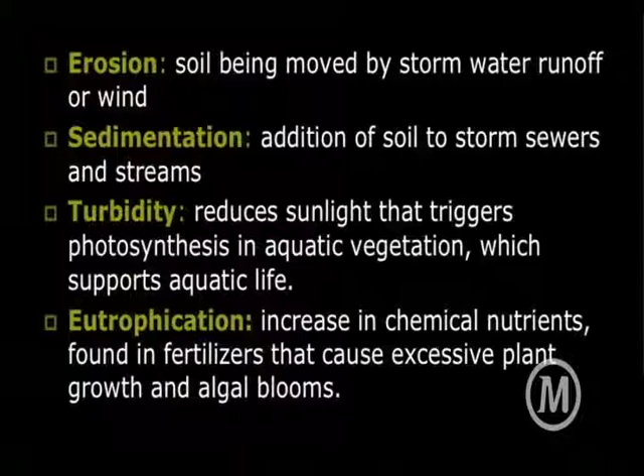So kids, we talked about how a lot of our most decrepit buildings in this country are schools, and we're trying to change that, but we let it get a little too far. Kids are really susceptible during these developmental stages to toxins, and a lot of asthma and problems like that are coming from the VOCs, the volatile organic compounds, in those spaces.

HVAC systems that don't run efficiently, that aren't kept up, the maintenance isn't held up. So it's really important to be addressing schools.

So how LEED addressed it: there's actually a prerequisite that says if it was previously a landfill, it cannot be a school. Any other type of brownfield can be remediated and get up to standards that allow a school on it, but it's really about being sensitive to the sites you choose.

And like we have a little girl here rolling around, who knows what they put in their mouth, so being sensitive to the actual site itself as well. You want to look at EPA standards, ASTM standards. Those are our testing standards to really see if we're meeting those codes.

So some strategies. Here's a shot of Europe actually working with its environment, where it just looks like it naturally evolved like a mountain out of those rocks. Not something we see much here today.

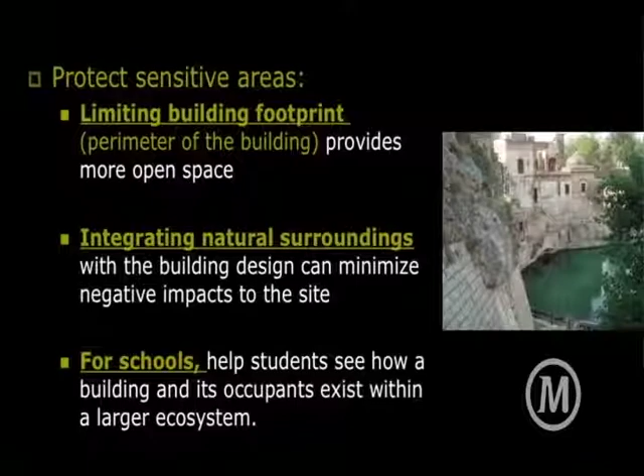So protect sensitive areas, limit that building footprint. That's what I talked about, even with contractors: limit your construction footprint as well, taking that a step further with integrated project delivery, thinking about how you want to design the footprint of your building to maybe work around what's naturally there.

That can be a cost saver too. Maybe don't dig out that boulder, maybe work around it, maybe don't dig up all those trees. Make it part of your shading that you want to use for your building, helping with passive cooling and daylighting by using natural vegetation around you. There's a lot of cost benefits from looking at this environmentally sensitively as well.

Triple bottom line: integrating natural surroundings, like those buildings emerging from those rocks, and for schools, helping kids see how they're engaging with their environment and how buildings impact that. There's a push for integrating that into the curriculum and having kids engage with the buildings themselves, whether it's a composting program or a green roof, and kids are sponges.

What we're teaching them is what they're going to carry on. So I think this is an important area to be hitting, and it looks like we're going that direction, or at least LEED is really encouraging that. So there's that social side as well. Sustainability and equity is really the key to success here.

Here's an example of a credit within the LEED rating system for building design and construction, new buildings, that got more heavily weighted. So here we're looking in the context of LEED. SS, remember, is Sustainable Sites. The title of the credit is development density and community connectivity.

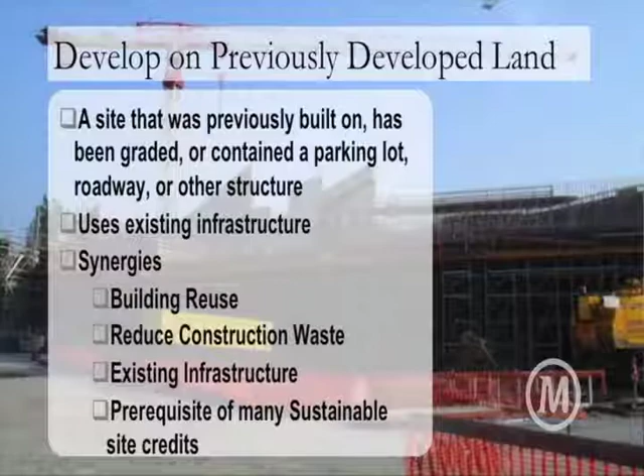It's about getting out of that comfort zone a little bit, but to me it's a lot more of a fun process. Reduce construction waste - less goes to a landfill if you're reusing it. And existing infrastructure, once again - not having to take roads, power lines, and utilities out to some natural place far from the city. Many sustainable site credits actually require using a previously developed site, so that's something to take into consideration if you're working on a LEED project.

So, develop in dense areas. There's a lot of things that come with a dense area, previously established. And when we're talking dense, it doesn't have to mean big skyscrapers - we're kind of talking about Europe. People love to visit Europe because it's human scale, about average 2-story buildings. It's not overwhelming, it's walkable. That's really what we're talking about - and sure, maybe a city as well.

So, reducing urban sprawl, protecting undeveloped land, protecting resources, giving more access to public transportation, reusing service lines and roads, and community connectivity - that's how LEED refers to it. You want to build in a densely developed area, and that's about 60,000 square feet per acre, which is the metric established by LEED.

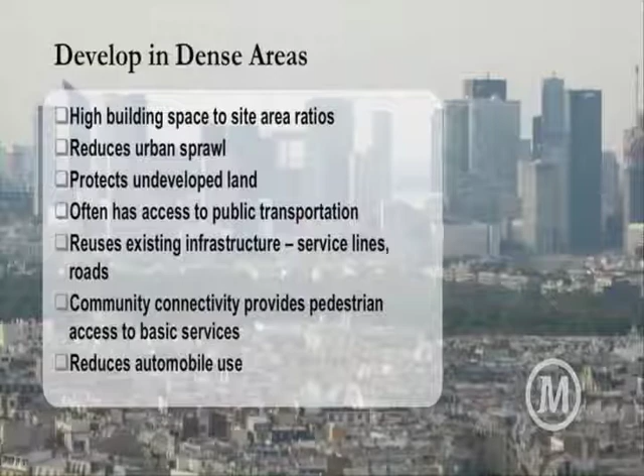Once again, that's one of the benefits of LEED - it just gives us a metric. What is a good density to be going for if we're planning a city or neighborhood design? It gives us some metrics to lean on. And community connectivity, according to LEED, that's about a half-mile walking radius to 10 basic services - restaurants can count twice. Banks, grocery stores, laundry - those basic things we're doing pretty much on a weekly basis on average - so you're reducing automobile use.

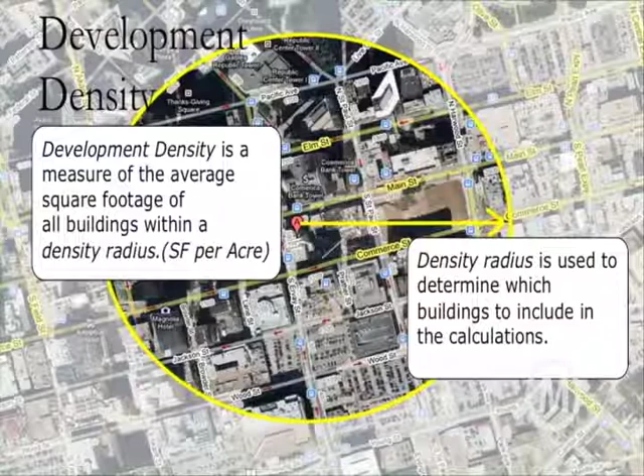So this is within the context of that credit that we introduce. Development density is one option for satisfying that LEED credit. Development density is a measure of the average square footage of all the buildings within a density radius. So this is a credit that has a little bit of math. It's not too scary - there's a square root in part of it, but there is a purpose for that.

You're just going to convert the acres of your site to square feet by multiplying by 43,560 square feet per acre, and take the square root of that. Calculators can do it for us, multiply by 3, and that gives us this density radius. So it tells us how far out we have to be considering the buildings to see if we hit that 60,000 square feet per acre number that says this is a dense, established area.

So that's our density radius. Any building even touching that radius would be tabulated in a table where we divide the building square footage by the site acres, and that's that building's density. You add those all up and get an average. If your average is 60,000 square feet per acre, then LEED has decided you're in a dense area - you meet the development density criteria.

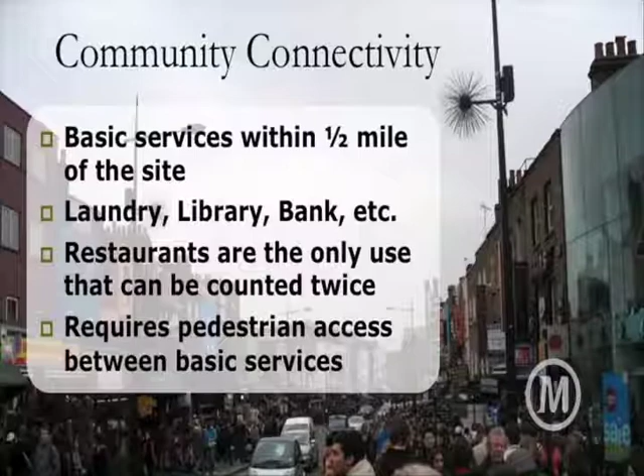Community connectivity - there's different options for how you can achieve many of the LEED credits. For this one you could either do development density or community connectivity, and that's a half-mile radius. So you don't have to do any calculations, just get the radius. If you're already in an area that has laundry, library, bank, those type of services, and you can walk to it - it has to have a pedestrian path - then you can meet this option pretty easily, just by listing those 10 different amenities and showing an aerial view of where they're located.

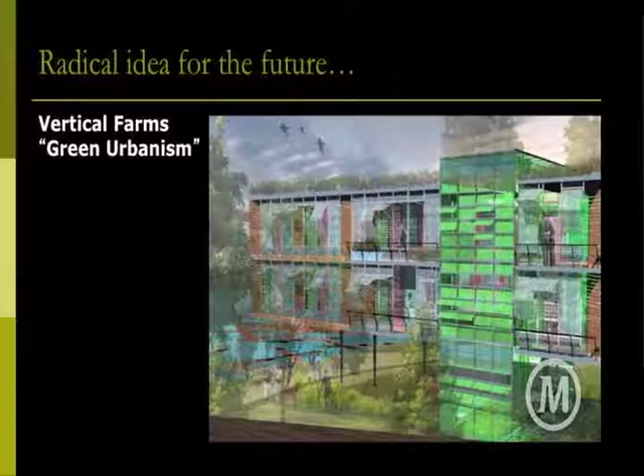Vertical farms - this is Ken Yeang's work. He's been termed many different things, godfather of green, granddaddy of green, because he's been doing this since the beginning of his work over 40 years ago. His work goes from eco-master planning, really looking at the environmental systems and how we're interacting with it. He mentions that with urban sprawl and taking these highways far out into natural areas, it's not just where those developments are - the highway is disrupting the ecology of the whole trip there, because it really depends on the whole space.

You disconnect it, you've broken those systems, that ecology of the area. So he really brings natural spaces into the building. He wrote a book on eco skyscrapers about how you can interweave some of these green spaces up and into the building. So you can have an urban building that actually has big terraces, natural ventilation actually working through, ramps, natural ways to get around. And like we discussed, people like to be in these spaces. We like daylight, go figure, we like natural fresh air. It keeps us more awake, more productive. We're happier people.

Brownfields - once again we're seeing an example of a LEED credit, this only being 1 point, so it's not as heavily weighted, but there are many reasons to maybe use a brownfield. A brownfield means it's contaminated in some way, and according to LEED, there's a couple different ways to verify that.

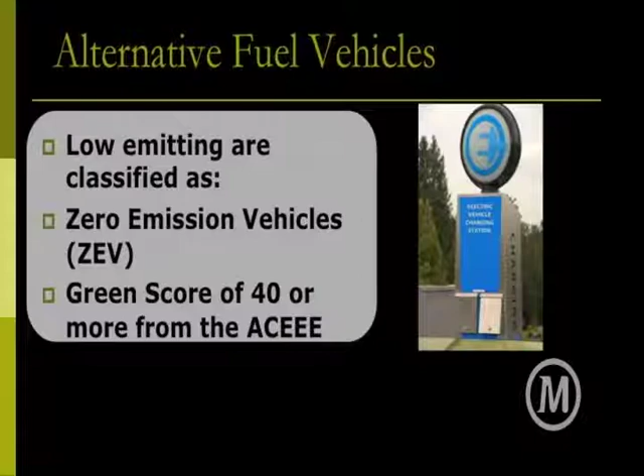Alternative fuel vehicles - so not just thinking about mass transportation, that's not available to everybody in every location. We're lucky here in Portland, Oregon. But alternative fuel vehicles are also very important - hydrogen, ethanol, hybrid vehicles, maybe run by biomass or biofuels. There needs to be some measure of how efficient these are. They have to be classified either as a zero emission vehicle, ZEV, or have a green score of at least 40 or more by ACEEE, American Council for an Energy Efficient Economy. And by the way, that was a refueling station for electric cars outside the Hawthorne Fred Meyer you saw an image of. So we're preparing for these changes - it takes the infrastructure, we have to lay down the framework for some of these big changes to be possible. It's good to see it emerging.

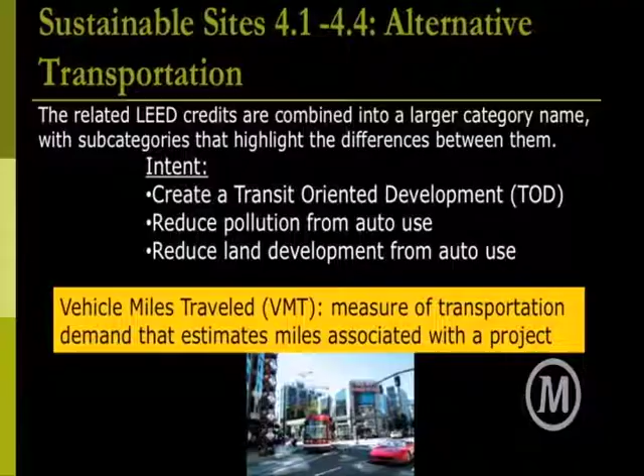So, sustainable sites, alternative transportation - this is an example where there are multiple credits associated with one concept. Credits 4.1 through 4.4 are independent credits, but they all deal with alternative transportation in different ways. There's a credit for mass transportation, bicycle parking, having racks available for people to bike - but not just racks. If you're going to work and you're all sweaty, that may not be appropriate for your profession, maybe it's okay, maybe it's not. So have a shower facility within the building for people working there or using that space. If they live there, they're assumed to have their own showers, but if not, you think about showers in addition to covered racks, a safe place for people to store their bikes. The intent is to create a transit-oriented development, TOD, reduce pollution from auto use, and reduce land development from auto use. So you're not only reducing CO2 emissions from fewer people driving, but also reducing the amount of parking area needed - the impervious asphalt pavement that has problems with heat island effect and stormwater. So it's multiple effects - you have to look at not just one element, but many sides to all these strategies.

Vehicle miles traveled, a metric you can use - VMT. It's a measure of transportation demand that estimates miles associated with the project. So if you have a carpool program, or parking spaces available for electric vehicles for a certain percent of your building, then you're reducing the vehicle miles traveled associated with your project. You're taking that initiative.

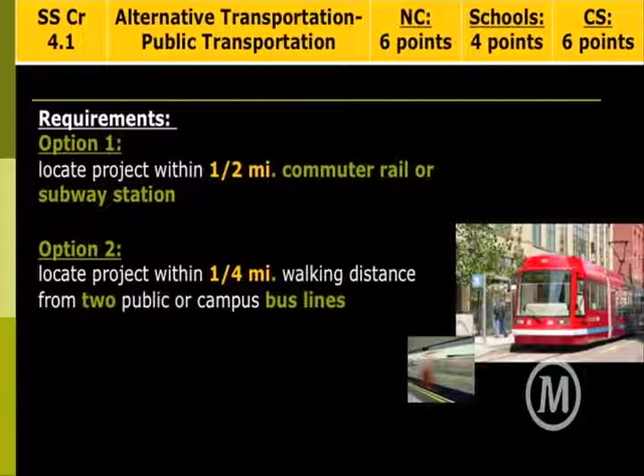Here's an example - much more heavily weighted in 2009 is alternative transportation, public transportation. It's basically encouraging you to take advantage of these amenities if they're in your area. In Portland, we don't have much of an excuse to choose a site that isn't close. So 6 points for new construction, 4 points for schools, 6 points for core and shell - but here's what we're really talking about today. Do you remember how many points it took to get certified in LEED 2009? 40? Yes. So 6 points is a lot for one credit, and this is just to locate your building within half a mile of a commuter rail or subway, or within a quarter mile of 2 bus lines. You could locate your site there. When you're going through your ecocharrette with your scorecard out, you go, low-hanging fruit, this is easy for us - 6 points, we're within a half mile of the MAX line if you're in Portland. This is something you want to identify early on in a project, to know your opportunities, when setting targets for LEED certification or sustainability. Because there are many incentives and inclinations to get certain certifications, in addition to just good responsibility and showing you took these initiatives.

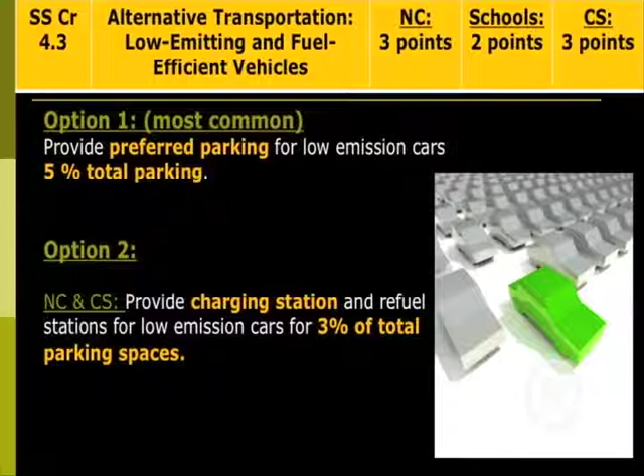Here's an example within the same sustainable sites credit 4 family, but it's 4.3, dealing with low emitting and fuel efficient vehicles, like we looked at in that past slide - 3 points for new construction, still pretty heavily weighted, that's why it's in orange. This is providing preferred parking for low emission vehicles, for 5% of the total parking, as one option. Option 2: provide a charging station to refuel those electric cars or whatever alternative vehicle it is, for 3% of the total parking spaces. So once again, you have options in many of these credits for how you achieve it.

So we're talking about 3% of the parking, or maybe 3% of the full-time equivalent occupant. This is another measurement that LEED uses for calculations. That's really what's useful about LEED - we're using a metric, something universal for understanding this green building rating system that evaluates how sustainable a building is. So full-time equivalent occupant - you have to understand how many people are actually using the building.

You're not just counting people, because some are going to be there part-time - whether you work half-time, or you're in a retail space with transient occupants coming in and out. So how do you calculate it? A full-time equivalent occupant is somebody in the building 40 hours a week - their FTE value is 1. This is an important concept that runs through many credits within the LEED rating system when you're doing calculations.

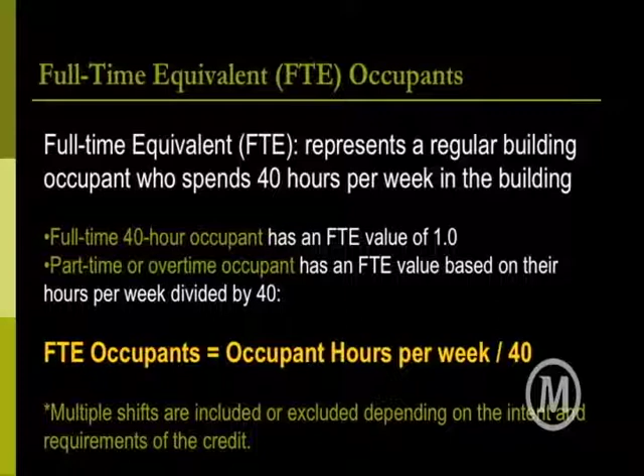For a part-time or overtime occupant, you take the hours per week divided by 40. So if you work 20 hours per week, half-time, your FTE value is 0.5. Not scary math, just something you have to be able to evaluate - occupant hours per week divided by 40.

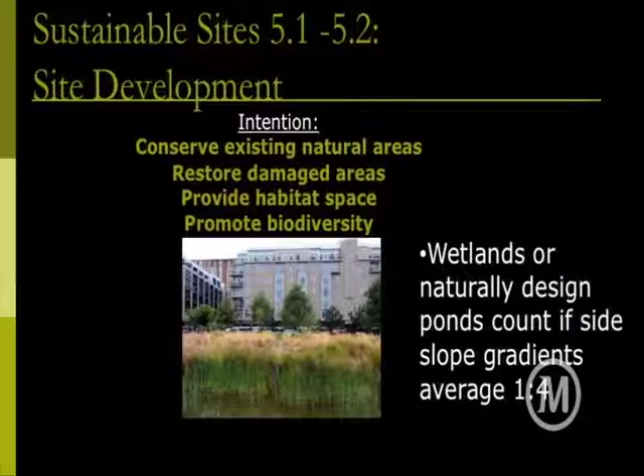Site development has 2 credits related to it, but the intent is the most important part: conserve existing natural areas, restore damaged areas, provide habitat space, and promote biodiversity. Biodiversity is that natural variation in ecology and how these systems work that we really can't recreate. When we cut down trees and replant one type, we're not recreating what was already there - we have to be cognizant of what's native in that area and what will actually survive. Wetlands can count towards open space in the LEED rating system.

But if it's a big crater or something we've created, it can have more of a slope of 1 to 4 on its sides. Here's a shot of Portland showing this wetland type area in the middle of a very vibrant community in the Pearl District. This was a choice made, I'm sure very early on, to preserve that land and let those natural ecosystems do their job - help with stormwater management, lower utility bills. Just let that site do what it's intended to do.

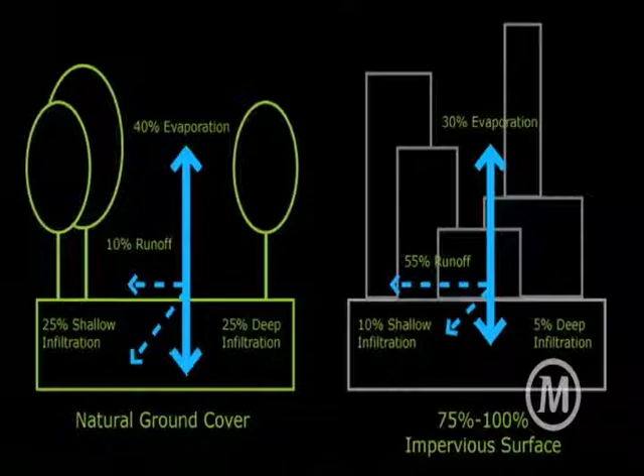Here we've got impervious surface, like 75 to 100%, not atypical for a developed area. And here we only have 5% of it going back into deep infiltration, recharging those aquifers. That's a problem. If we look long term, when we get into the water section, we'll see why this is such a problem and why we are going to see some changes in the next few years.

55% of it is runoff, so we're just shooting it away. In Portland, we could be using this for many resources. California would be envious of the many months of rainwater we could collect and reuse. Our codes are just catching up with that now, letting us actually use that rainwater for multiple sources, which we'll look at in the water section.

Strategies. So once again, there are structural things you can do and non-structural things you can do. These are really pretty cost-effective. Rain gardens can be a nice aesthetic addition to a building.

Vegetative or bioswales, vegetated swales or bioswales, kind of interchangeable. Underground parking: if you have underground parking, you have less asphalt covering the site, so you have more opportunities for pervious surface and vegetation. That's also a synergy with a few other credits, like open space, keeping nice vegetation, and heat island, which we'll look at.

Open grid paving, shown in that photo, is when it's 25% vegetated, then you can call it open paving according to LEED, and it can count towards vegetated space for some credits. I think I can walk on high heels and still get around here.

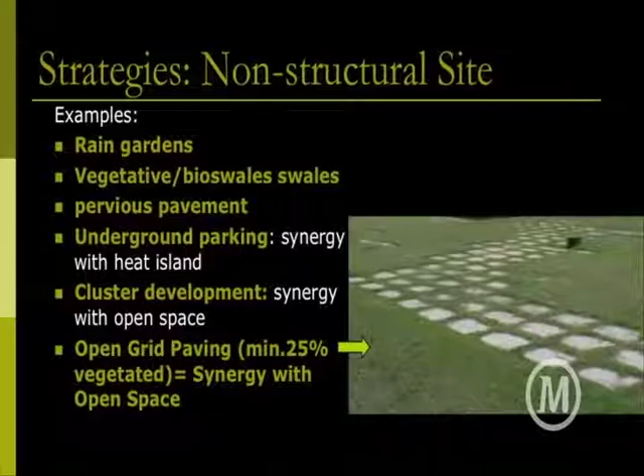Porous pavement or permeable asphalt has a few variations. This could look pretty similar to typical asphalt, but it allows water to infiltrate through. Below that is a diagram of uniformly graded stone, which needs 40% void space to allow water to keep coming through. In this case, since it might be heavy traffic with a lot of discharge from cars, you may want a filter fabric before letting it go back into the deep infiltration layer.

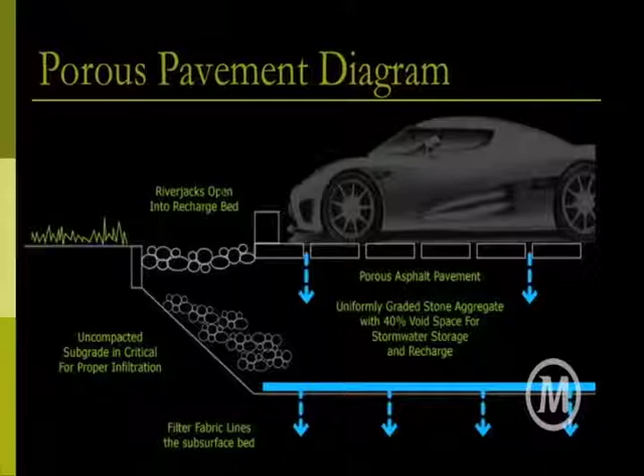More strategies, looking at a new model of building. They don't have to all be boxes; we can think differently. Green roofs would be a way to handle stormwater management, give more open space, and once again reduce heat island, creating synergies in the impacts and benefits we get.

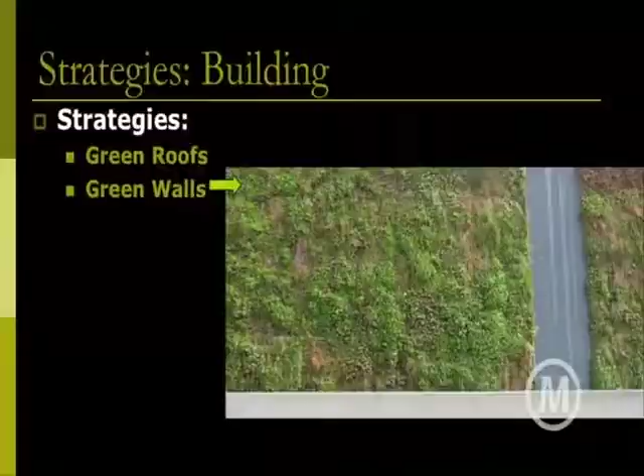Here's an example of a green wall on a building envelope, and the close-up shows water actually funneling down from the roof into this collection area, feeding this green wall and possibly being reused for other resources. This green wall can have many benefits depending on your climate - maybe you want that shading to cool your building down. Many benefits can come from this, helping air quality and so on.

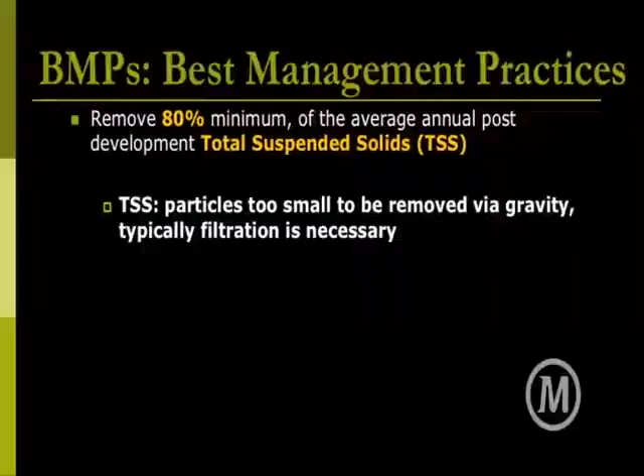Best management practices, once again for our stormwater management. This is really about treating the quality of stormwater runoff before it leaves your site, reducing the total suspended solids. We talked about turbidity, those little particles too small to settle to the bottom of a stream or river because they're just hovering.

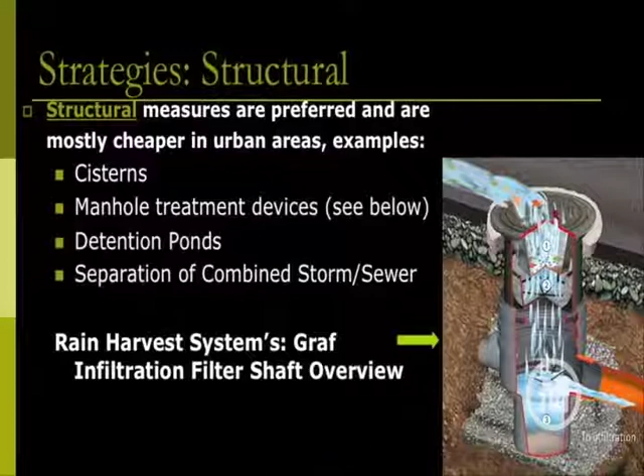In that case, you would need some sort of filtration, and here's one example of how to do that. Rain Harvest Systems manufactures this infiltration filter. It goes right into this manhole, and then passes through several layers of filtration before it actually goes back to the main line.

Detention ponds are an example, and cisterns are for large collection of rainwater harvesting for reuse. As for LEED purposes, separation of a combined storm and sewer system is encouraged.

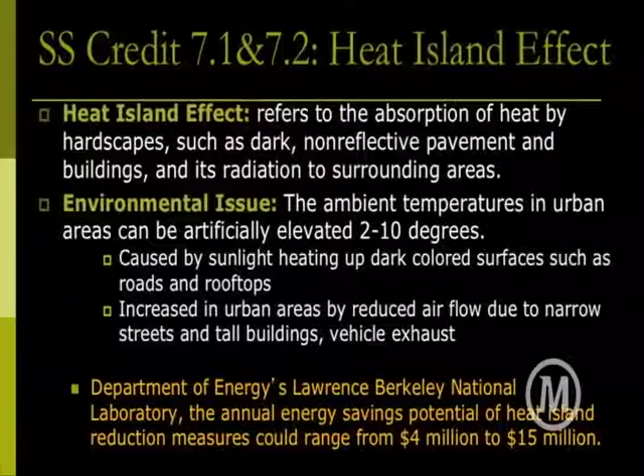All right, sustainable sites credits 7.1 and 7.2, heat island effect. These last three families of credits we're talking about are very important because what we're really talking about here is synergy. If you start looking at these strategies, they're all working together. Heat island effect is what happens from dark, non-reflective surfaces collecting that heat - we've all felt it - and then radiating it back up.

All right, so we're looking at strategies for reducing heat island effect. But remember, these credits we're talking about—stormwater management, maximizing open space, heat island effect—all have a lot of synergies and things that work together.

So for heat island, provide shade from trees and structures, or something LEED 2009 started to incorporate—it counts PV panels as well. So shading on a roof from PV panels is seen as reducing heat island effect.

There's an interesting synergy between green roofs and PVs. PVs don't function as well in many systems the more heated up they get. So if you have a green roof underneath it, that can actually weight down the panel itself, helping with wind uplift and the structure you need, and helping with its efficiency by cooling the ambient temperature where the PV is at, because of that evapotranspiration we saw in that diagram with stormwater management.

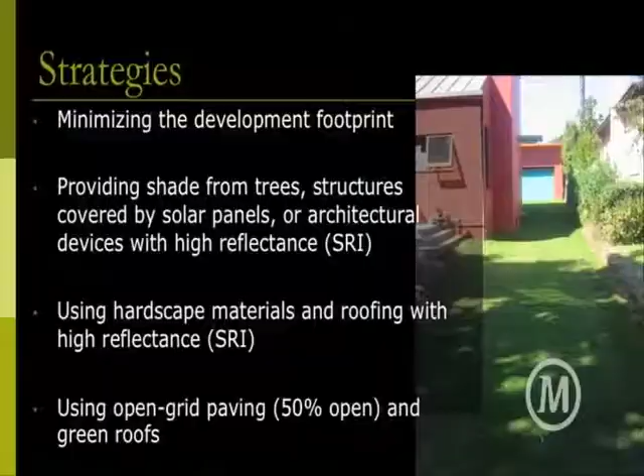Using hardscape materials and roofing with high reflectance—SRI. Do you guys remember what that stands for? Yes, well done—Solar Reflectance Index. So that's what we're looking for when choosing our roofing material. You want a high Solar Reflectance Index.

And that also applies to on-site materials, like concrete, or any number of paving systems. You can calculate that SRI value and help make that decision. It can inform other decisions too, like putting slag into your concrete, which often makes it lighter—so it's actually usually cheaper, has recycled content, and reduces heat island. A lot of synergies with it.

Recycled content—look at slag in your concrete, or fly ash. These both have recycled content and are good products to incorporate into your concrete. So don't just look at SRI value; think about what's actually going into these products, depending on what type of system you're doing. Underground parking has synergy with open space, stormwater, and heat island.

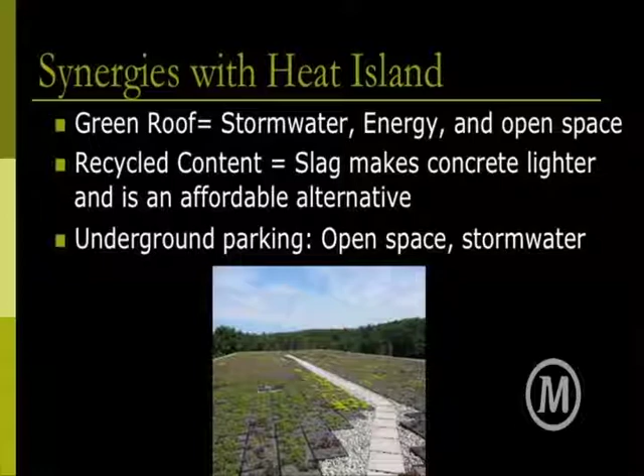Light pollution—minimize light trespass from the building and the site. We saw when we looked at regional priority credits that this was important to Michigan; they made it one of their top six credits most important to a rural area in Michigan. That's why they made that important, to reduce sky glow.

So you're increasing sky access, you're seeing stars—that's why we like to go camping, or to the mountains, or the beach, where we can actually enjoy that natural atmosphere. So you're improving nighttime visibility, glare reduction, safer driving, and reducing development impact on nocturnal environments. That's a big one, like in rural Michigan.

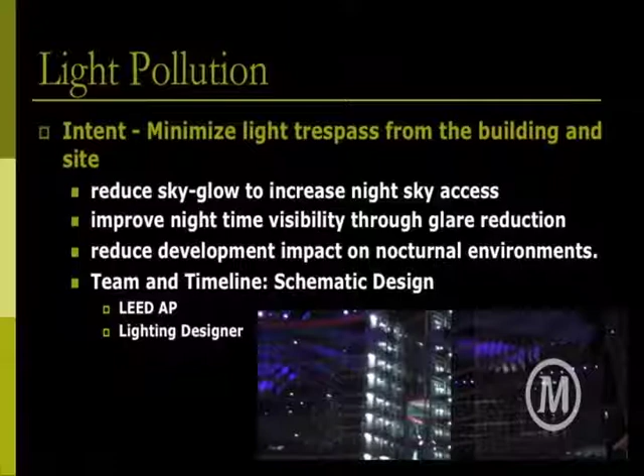And you want to look at this early on—in schematic design, you want to be thinking about what type of exterior lighting fixtures you're choosing and how you're designing your site, integrating that into the process early on. If you have a lighting designer, that's fantastic, but if we're an educated team, we can all be working together on these ideas.